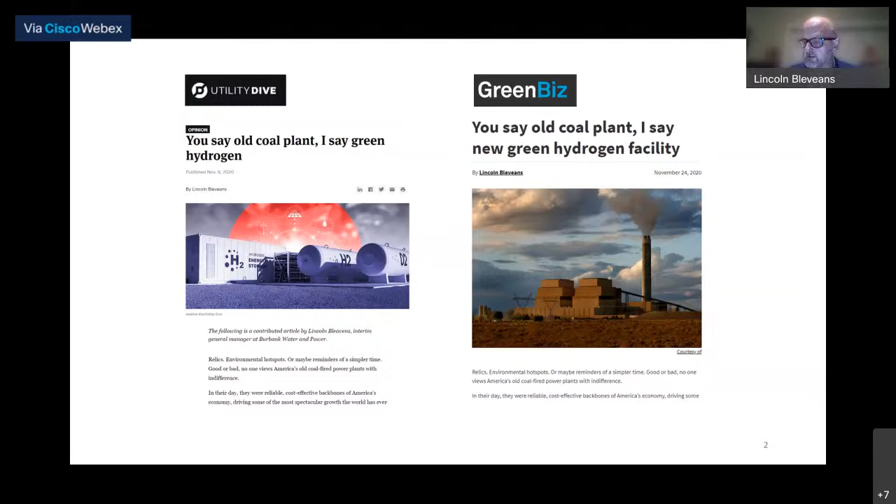So let me start about 250 years ago with the beginning of the Industrial Revolution. The Industrial Revolution kicked off economic growth like the world had really never seen. Lots of things got a lot better very quickly. But as we've come to realize, the Industrial Revolution also started the planet on a slower moving but incredibly destructive path called climate change. And that revolution was powered in substantial part by electricity. And a lot of that electricity was powered by coal in the US.

As we race to mitigate climate change, the cost structure of coal alternatives has pushed coal to the sidelines here. Renewable energy in particular has gotten remarkably cheap. And even natural gas has become less expensive than coal with the advent of enhanced production techniques like fracking and horizontal drilling. And that's left a lot of things stranded, jobs, investments, tax revenue, and the whole economic ecosystems that have grown up around these plants over the decades. So my view is that we can and must do better, both in the US and around the world.

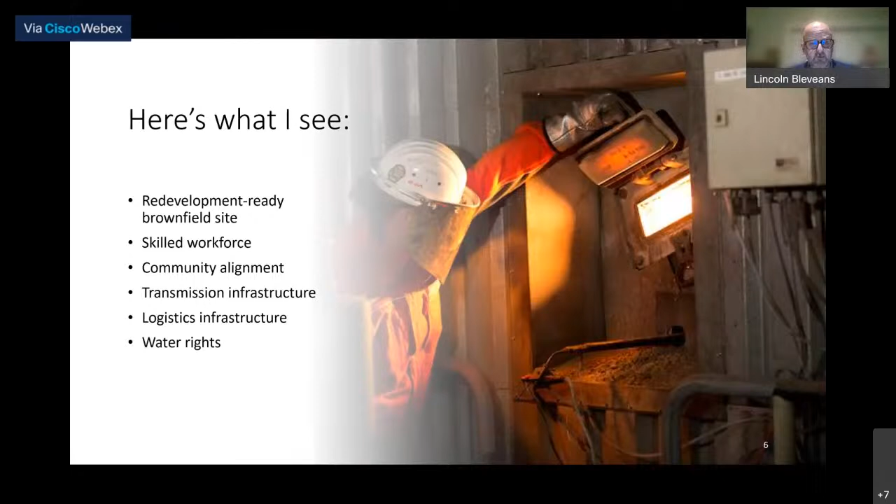So let's go back to that boarded up coal plant a couple of slides ago. It's very easy to look at that and see days gone by, but that's not what I see. I see a prime industrial site ready for redevelopment. I see a motivated community and a highly skilled workforce. I see infrastructure waiting to be repurposed, transportation from road to boat to rail to pipelines, water in abundance, and high voltage electrical infrastructure like transmission and substations.

Then let's take that reality on the ground and rewrite the equation for the age of climate change. Let's add technologies around green hydrogen production and end uses from gas turbines to transportation to industrial processes. And perhaps most importantly, let's recognize that the age of climate change is changing the very metrics with which we measure success. Economic costs in dollars, as we always have, but also environmental costs in dollars, greenhouse gas emissions and pollution, as well as environmental justice issues and social justice issues. Success isn't as simple to measure anymore, and that's okay.

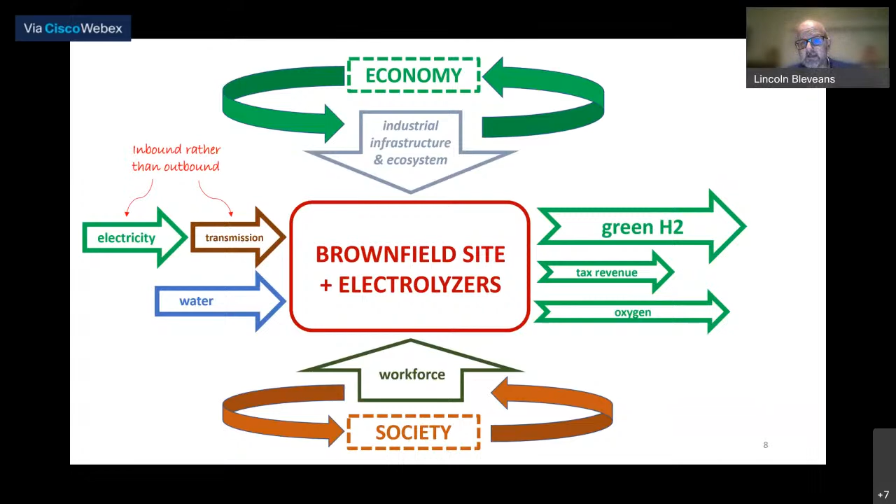So one of the challenges with this model is that traditionally making hydrogen with electrolyzers has involved a tremendous amount of very expensive electricity. And obviously you still need a tremendous amount of electricity, but at least in California, here in the US, the cost of electricity has undergone a massive change. We're seeing, because of solar production, negative pricing. In other words, loads being paid to take electricity off the grid, almost like a tipping fee if you had a trash burning plant. So one of these major inputs, the electricity, has gone from a cost to a negative cost.

So the whole price structure has changed, and that's a whole new world. And I actually think that the California experience will be replicated around the world, especially in places with a lot of solar power.

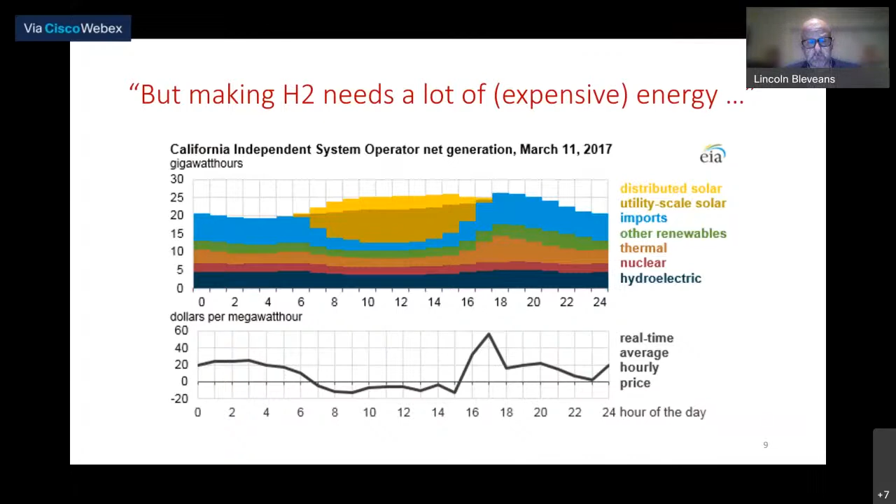That said, there's a big challenge, and I want to recommend an article by a couple of colleagues and friends of mine, Bob Schulte and Fred Fletcher. It was just in Power Engineering, and it talks about the cost of green hydrogen as compared to the capacity factor of the renewables used to produce it. When you look at solar alone at about a 25% capacity factor, you're looking at very expensive green hydrogen on a dollars per kilogram basis. You really need to find a way, whatever the particular market will offer in terms of diversification and energy storage, so that you can drive up the capacity factor of the renewable energy you're using, and thereby drive down the cost of the green hydrogen.

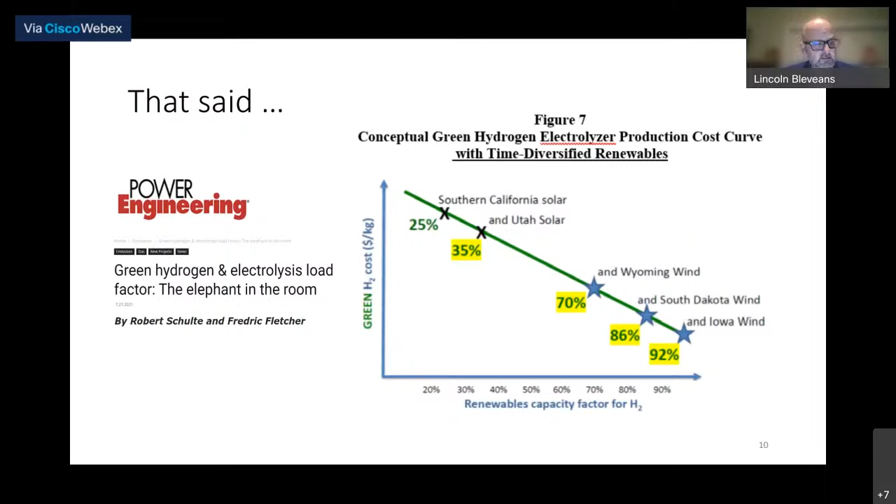This is something that we all need to work on, and I would really recommend this article for folks who want to dig into this. So this isn't, like I said at the beginning, theoretical.

This is actually happening about 1,000 kilometers from here at a place called Delta, Utah, a very small town. There has been an 1,800 megawatt coal plant there since the mid-1980s that has served Southern California, including the utility I worked for until very recently, Burbank Water and Power, which is where Hollywood is. We're taking that 1,800 megawatt coal plant and turning it off in 2025, switching on an 840 megawatt natural gas and hydrogen combined cycle facility at the same site. That will provide baseload power, but also tremendous renewable integration, which is desperately needed in this part of the country.

We're starting off with 25-30% green hydrogen to be produced on site. And Mitsubishi, our OEM, has promised that they will get to 100% green hydrogen firing capability within about a 10-year period. So this is going to be an absolute key to Southern California's clean energy, sustainable future.

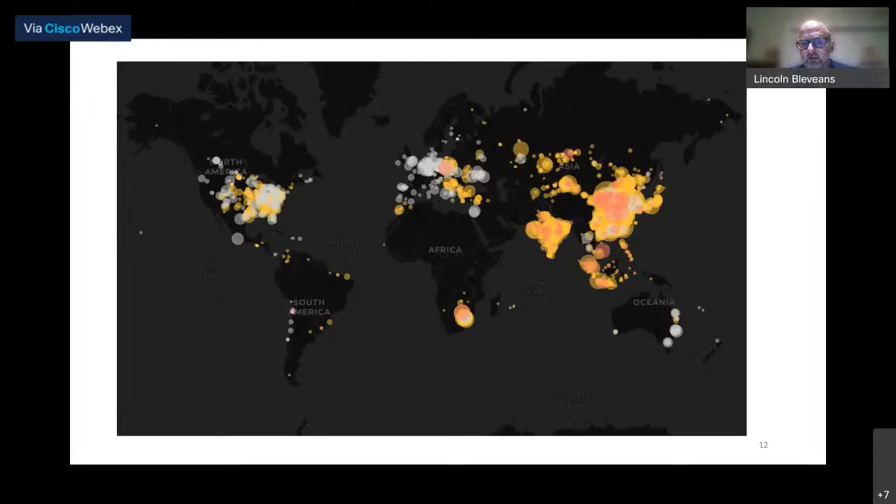And frankly, we're all in this together. If the last couple of years have taught us anything, it's that what happens in one part of the world is going to affect things in the other part of the world, whether that is politics or climate or what have you. So when I look at that map of all those coal plants, I think this is something we can think about applying to our situations no matter where we are, because decarbonization is how we get through this, is how we get through climate change.

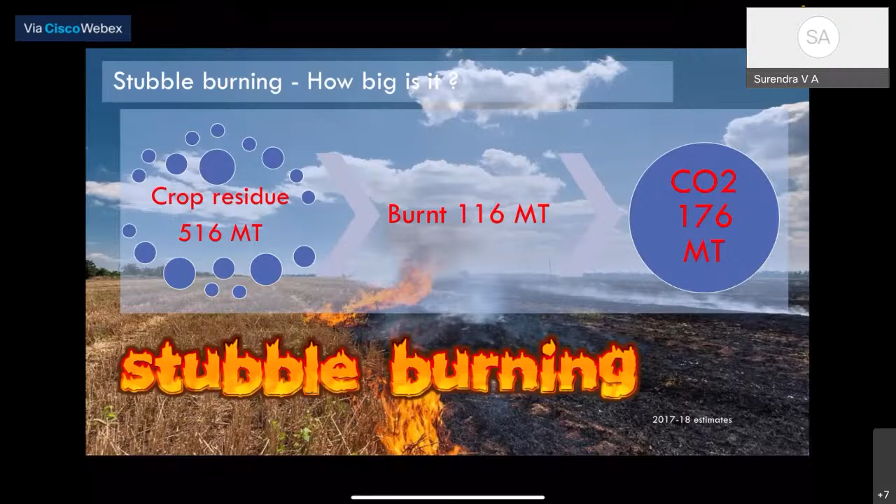And how big it is? If you see, crop residue, we are producing around 500 plus metric tons. Out of this, we are burning 120 million tons approximately, 100 to 120 tons will be burning, and which is giving out 176 million tons of CO2, which is simply going as waste heat energy into the atmosphere and is causing a lot of problems also.

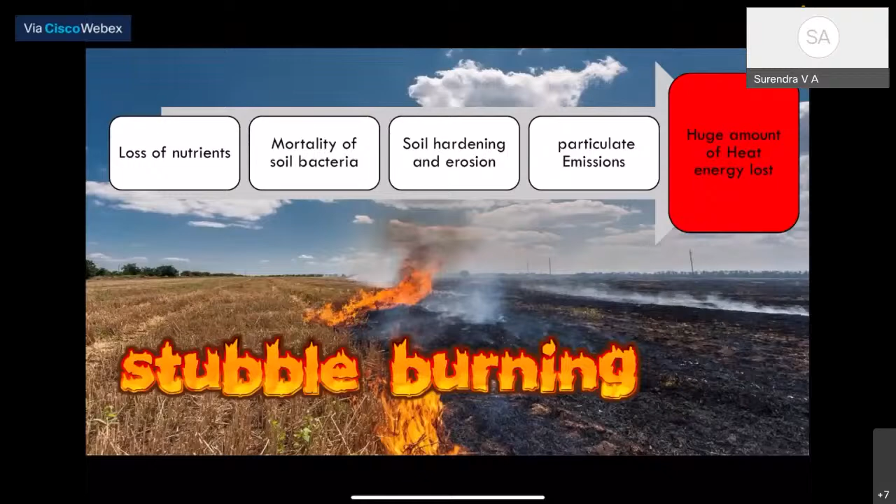Stubble burning causes loss of nutrients to the ground, and mortality of soil bacteria is another issue we face because of this stubble burning. Soil hardening and erosion is one more issue we face, and moreover particulate emission, which is causing a lot of pollution issues in our country. And on top of all these things, we are losing a huge amount of heat energy to the atmosphere, which is a great concern for people like us who are in the energy industry.

How is this a source of pollution? If we see, Uttar Pradesh, Punjab and Haryana contributed around 60% of the crop burning that is happening in North India. Whereas if you see the statistics, even if you burn 1 ton of crop residue on the field, it releases approximately 1.4 tons of CO2, around 58 kgs of carbon monoxide, particulate matter of 11 kgs, 4.9 kgs of NOx, and 1.2 kg of SOx. This is as per the analysis by Center for Science and Environment Analysis.

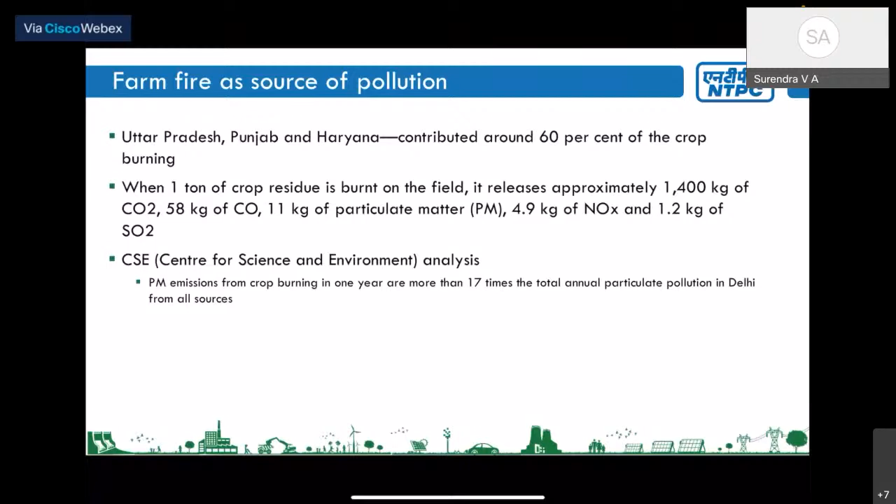PM emissions from crop burning are also very high, 17 times the total annual particulate matter in Delhi alone itself. This is the statistics if you see, and this is the proportion of the pollution that is caused by the farm fires, and this is due to crop residue.

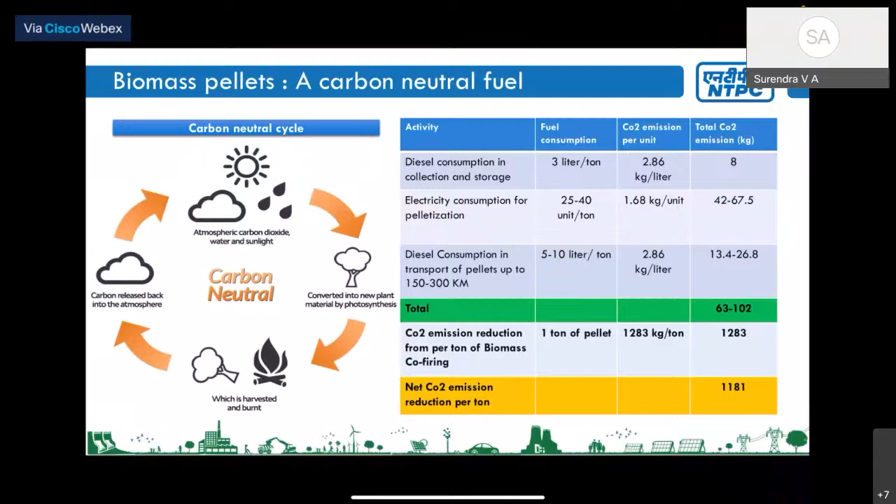And what is the solution for this? The solution is we can use this heat energy that is available in the crop residue by converting them into biomass pellets, which we can say is a carbon neutral fuel. May not be 100% carbon neutral, but we can say more or less it is a carbon neutral fuel. If you see in the cycle, we are consuming around 63 to 102 kgs of CO2 for producing these biomass pellets, whereas we are saving around 1181 kgs of CO2 emissions, as a net saving, there is a net saving of 1181 kgs of CO2 per ton of biomass pellets we consume. This is the basic advantage we get from doing this thing.

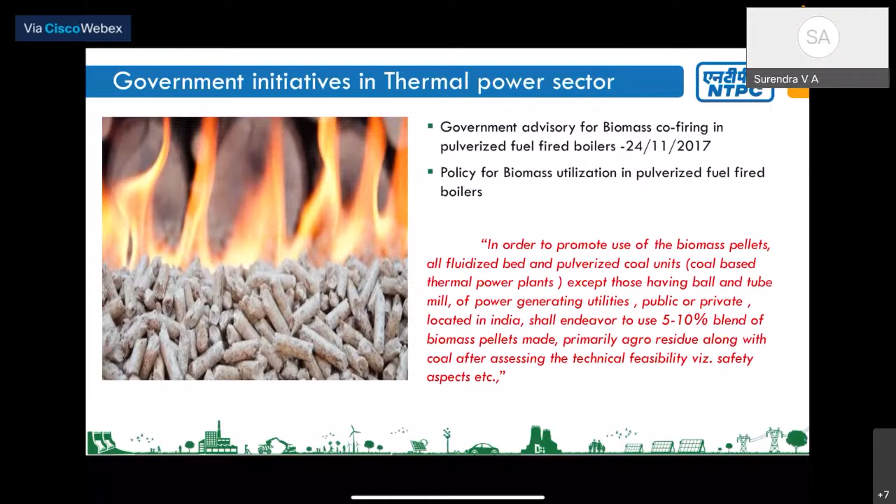And what are the government initiatives for this in the thermal power sector for utilizing biomass pellets? If you see, Government of India has issued an advisory for co-firing in pulverized boilers in 2017 itself. The policy goes like this: in order to promote use of biomass pellets, all fluidized bed and pulverized coal units, except those having ball and tube mills, of power generating utilities, public or private, located in India, shall endeavor to use 5 to 10% blend of biomass pellets made primarily from agro residue along with coal after assessing the technical feasibility and safety aspects. This is a guideline that has been mandated by our Government of India, and taking cue from this initiative, this policy, we have gone ahead to implement biomass co-firing in some of our units.

If we see what are the benefits of biomass co-firing, it's a win-win situation for the farmers and the environment, and even for us also. We get some amount of heat energy from this, and we can reduce the pollution, so reduction of SOx and NOx, and we can neutralize the carbon footprint by biomass co-firing. This is a new source of income for farmers, and employment generation is possible in the biomass industry. These are the 4 advantages we get by biomass co-firing.

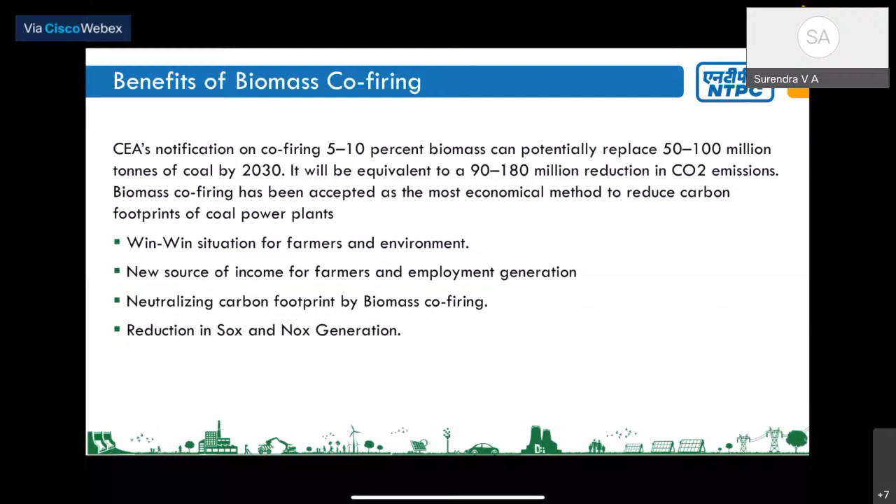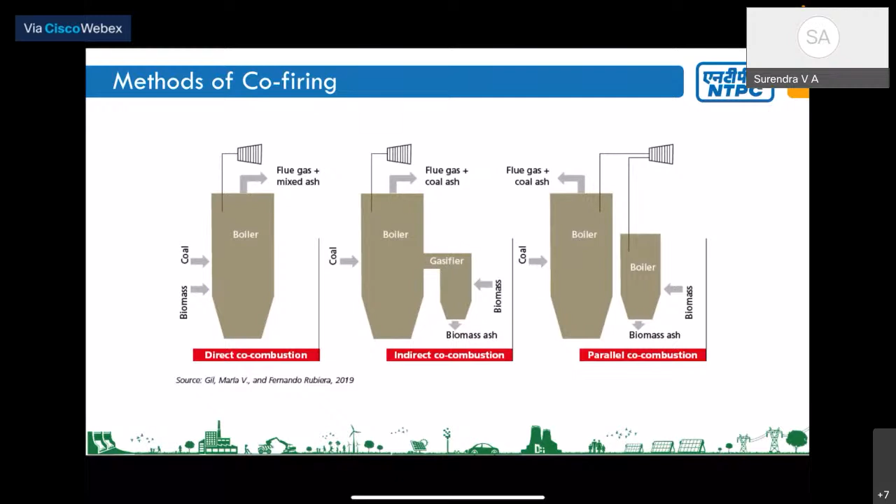And if we go further into the details, what are the different methods by which we can co-fire this biomass in our plants? This is by direct co-combustion, indirect co-combustion or parallel co-combustion. We have adopted the method of direct co-combustion in NTPC. In indirect co-combustion, there will be gasification of the biomass, and in parallel co-combustion, there will be a separate boiler for biomass altogether. But we'll be concentrating more on direct co-combustion only. This is what we have adopted in NTPC.

And if you see, sir, the coal versus paddy straw ash analysis, in this you can see more of the products produced by alkali metals and alkali earth metals in the ash, and biomass ash is characterized by a low melting temperature and a high tendency to slagging and fouling. So if we start increasing the amount of biomass, we will get these problems. But up to 5 to 10% mixing with coal, we may not.

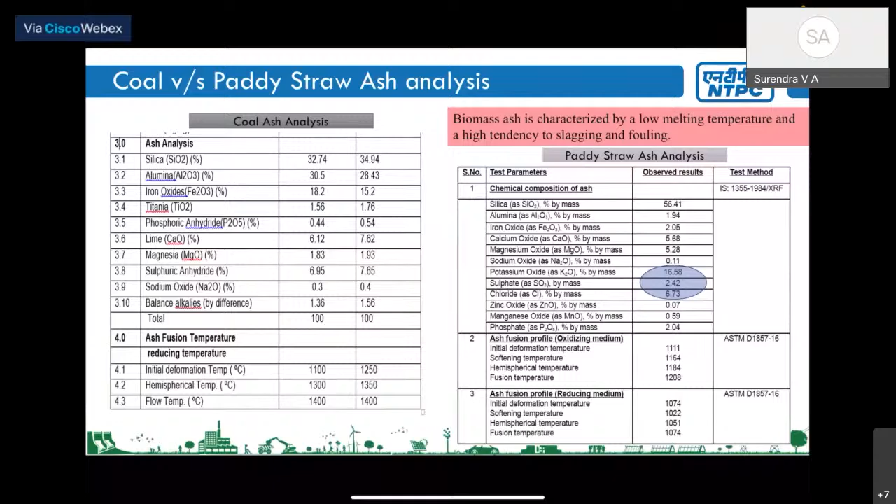Sodium and potassium may react with sulfur and produce alkali sulfates, and the vaporization and subsequent chemical reactions will produce fouling, corrosion, and silicate formation in our boilers. This is one of the risks we get because of co-firing. However, it is seen internationally also that we do not have any major problem if we only mix up to 5 to 10% of biomass with the coal.

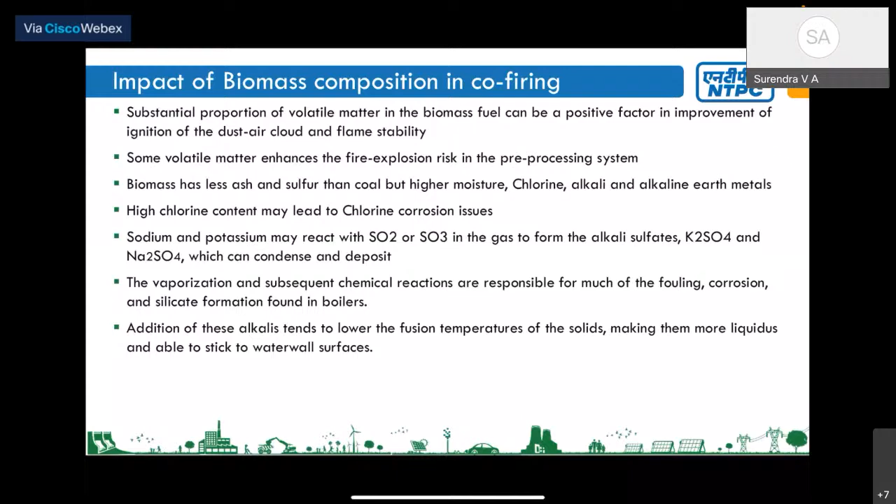Then, how is biomass co-firing going to affect the environment? In the case of CO2, it is almost neutral. It will not increase CO2 emissions. Co-firing will reduce emissions by almost as much as we are saving coal. Anyway, this biomass is going to be burnt in the fields, so that much we are burning here instead. So in our country, we can consider it a saving in CO2 emissions. We are reducing CO2 emissions by that much.

In the case of SOx, biomass generally has much lower sulfur content together with a high concentration of alkalis, so SOx will also get reduced. For NOx, due to lower flame temperatures, thermal NOx will get reduced. It can also reduce NOx through the lower nitrogen content in the biomass. And in the case of particulate matter, up to 5 to 10% mixing with coal, our ESP performance may not get affected, but if it increases beyond that, due to the high resistivity of fly ash, PM 2.5 emissions can increase. This is the impact of biomass co-firing on the environmental parameters.

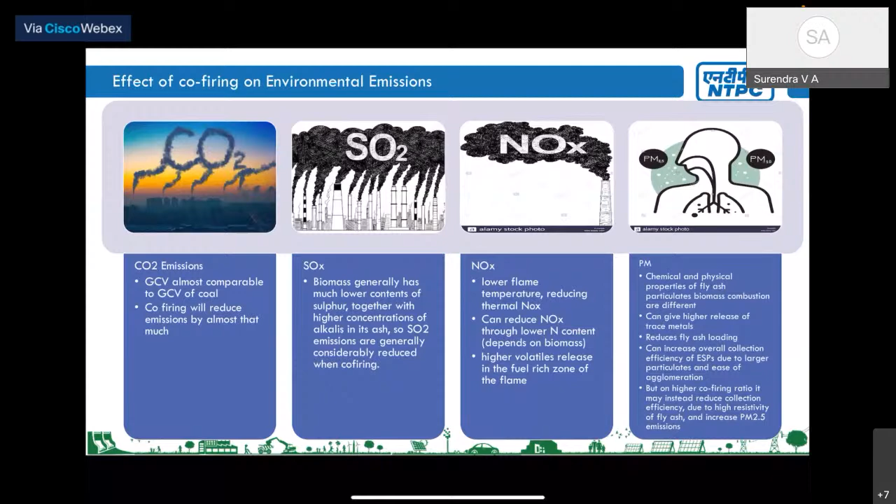And ash utilization, this is one of the core areas where we are utilizing ash. Our ash is totally being used in the cement industry as a product for making cement. In case of the EN 450 standard, it specifies only pure coal or anthracite combustion ash, whereas the 450-2 standard is a revised one, and in this it can allow maximum ash content up to 10%.

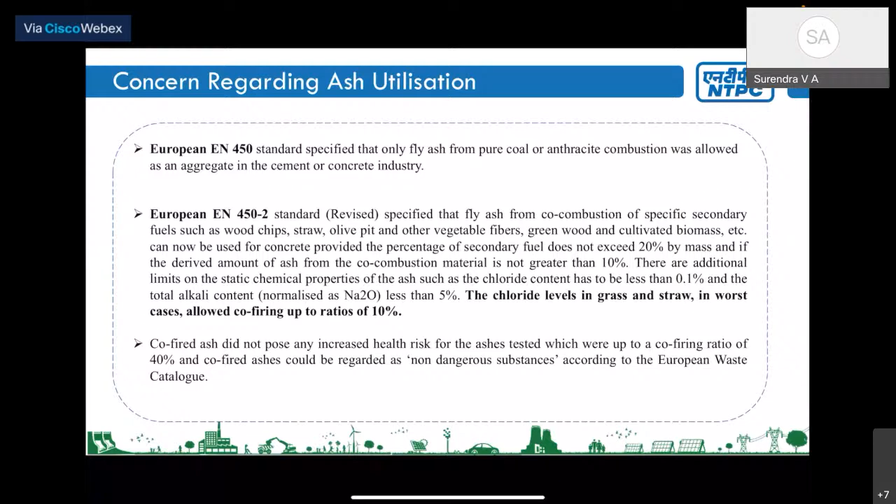That is, the ash produced because of the co-combustion material should not increase more than 10% of the total ash produced. And in addition to that, the chloride levels in grass and straw, in worst cases, allowed co-firing may go up to 10%. This is the disadvantage here. And the co-fired ash does not pose any increased health risk, because it is not producing any dangerous substances in the combustion. This is also one of the points we can think of. So this is the basic concept we have discussed.

Now coming to NTPC's experience in biomass pellet firing. In NTPC, we have used the direct co-combustion philosophy for co-firing, and our NTPC Dadri is the first station that has used biomass pellets for co-firing along with coal. And we have monitored the boiler performance during the biomass co-firing. Based on the experience of Dadri, we have further identified 14 stations for biomass co-firing. So now we have got 15 stations where we are trying to fire biomass. Out of these, 10 stations have already started firing; the remaining stations are yet to start.

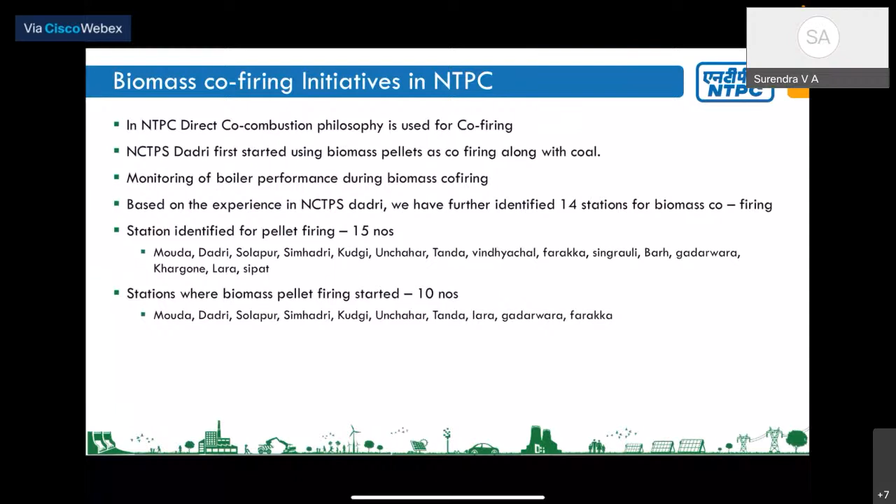What is the strategy we have adopted for biomass co-firing in NTPC? First, initially, we formed a task force for identifying the issues in firing of the biomass. And in Dadri, we conducted trials. We started with 2.5% in one mill and then increased up to 5%. And based on the experience we have gained, we have issued operation guidelines to be implemented across NTPC stations. At the station level, these operation guidelines will be further converted into local management instructions, LMIs, which will address the responsibilities and checklists to be prepared for taking necessary actions.

And these local management instructions shall also have standard operating procedures for all the activities in detail: how to do the handling, how to go for blending, how to store it, how to do the activities of storage, how we have to go ahead with combustion improvement, and what parameters are to be monitored. All these things will be explained in minute detail in the SOPs.

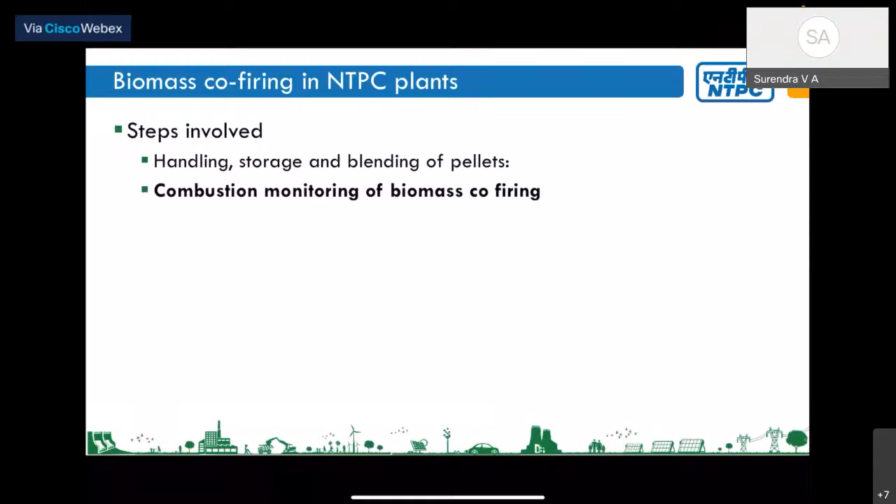Then for biomass co-firing, there are two steps involved. The first is handling, storage and blending of the pellets; this part is only handling. The second part is the combustion monitoring of the biomass co-firing, which is very important for us. For handling, storage and blending of pellets, first we'll go for receipt and unloading. Nowadays, we are getting biomass pellets only through road. This industry is at a very nascent stage, where pellets are only being transported by lorry. Rail transport has not yet started; that much mass production is not there right now.

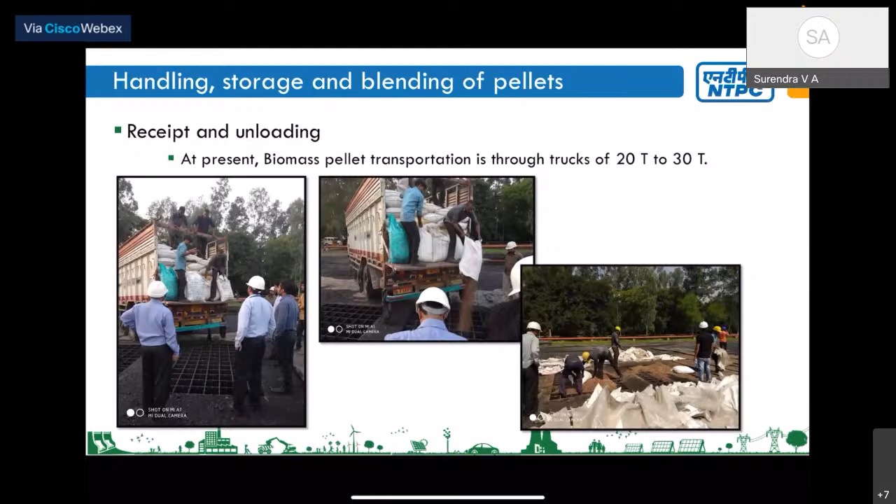So after getting the biomass pellets, we unload them in the identified areas in the CHP, coal handling plant. Then we keep them covered, because biomass pellets are hygroscopic in nature, so these are facilities where moisture should not enter. At the same time, biomass pellets have a high amount of volatile matter. So the area where we are going to store them should have facilities for firefighting, and facilities should be developed to transport from the storage area to the blending area, that is, up to the reclaim hoppers or the area where we put it onto the conveyor.

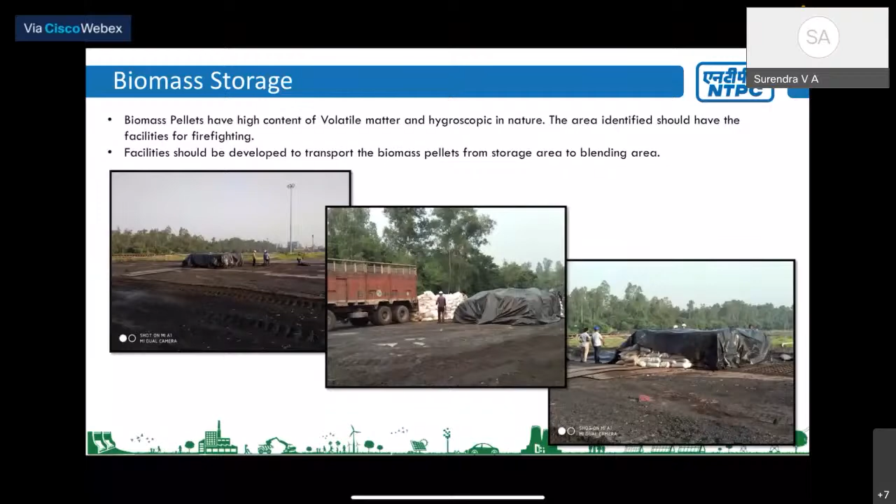And for blending and bunkering of the pellets, the blending ratio we have maintained only up to 5%. We have decided not to go beyond 5%. And in this case, it is site specific. Every site is different with respect to the configuration of the coal handling plant. So every station will identify where the blending shall be done, the methodology of how they will feed the pellets, and the chute or TP, transfer point, where blending shall be done. Then what is the control methodology?

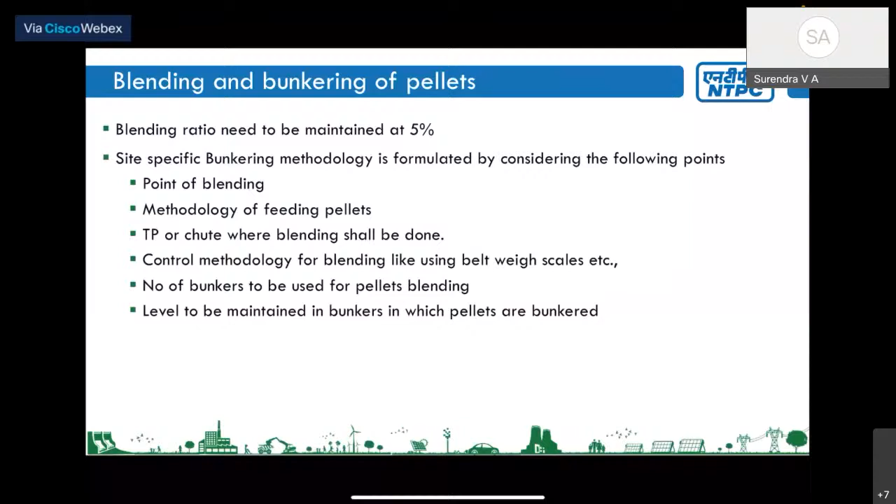How we will control, whether we have to use the belt weigh scales or whether belt weigh scales are not available, then implementing them. And number of bunkers where we will be using these pellets for blending, and how much level we have to bring down for accommodating the pellets in the bunker, because in a day we are getting pellets only at some particular time. We are not getting them on a continuous basis. So we are monitoring the levels also in the bunkers where pellets are to be bunkered.

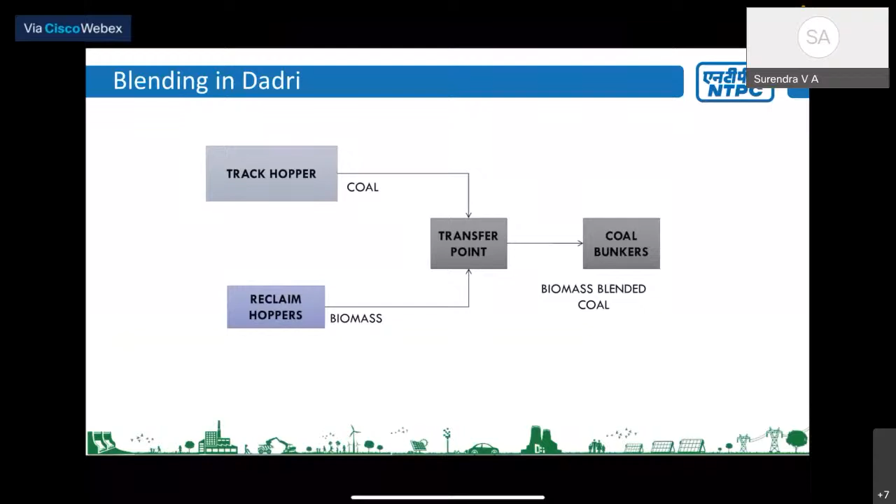Strategies for blending in Dadri is that there is a track hopper and the reclaim hoppers are there. From reclaim hoppers, we are feeding biomass, and from the track hopper, we are feeding coal. And at the transfer point, we are combining both and blending it to the identified bunkers only. We are not doing it in all bunkers. Of course, we have done modification in all, but we will identify and put them in those units, with the information to the control room.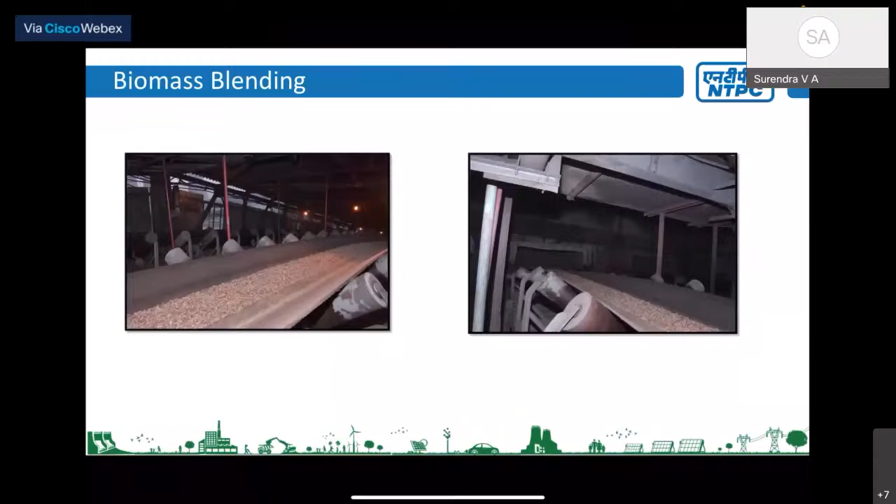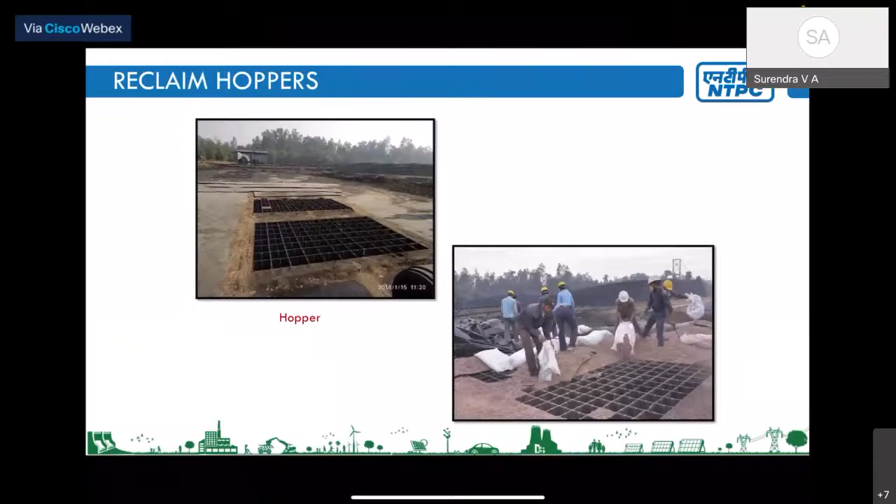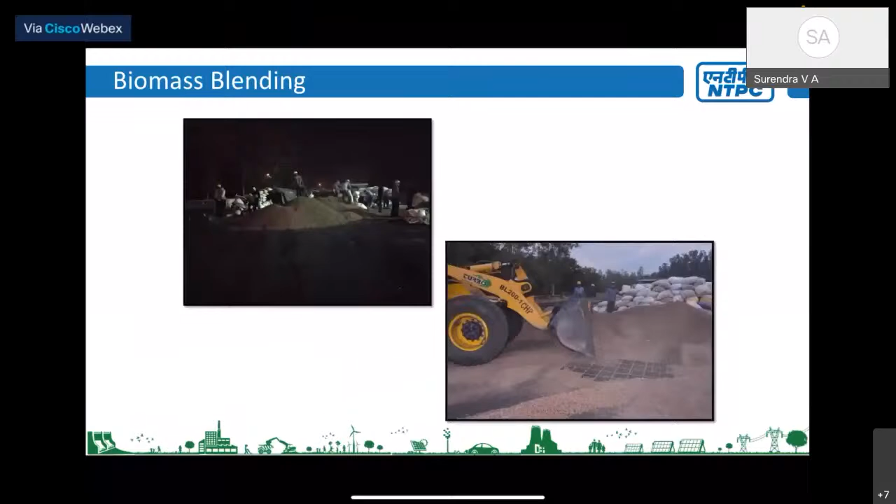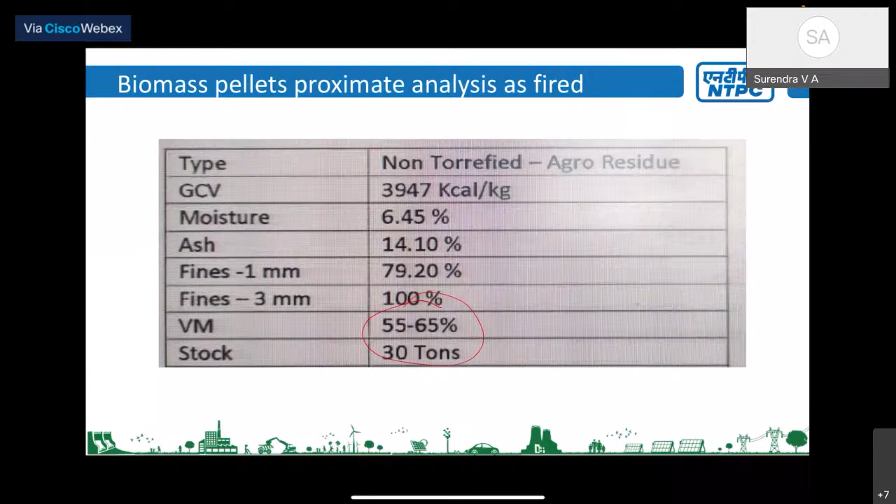And coming to the type of biomass we have used and analysis of the biomass, we are getting almost equivalent GCV. This is the pellets we have used in one of the stations, where GCV is around 4,000. Moisture is very less, 6%. Ash is 14%, and volatile matter you can see is very high, 55 to 65%. And per truck we are getting 30 tons.

So for handling this biomass, what are the precautions we have taken while the unit is in operation? The first thing is that in the fuel pre-processing system, we have ensured that the mill inerting system is charged up to the mill inlet to take care of any fires that can happen.

Mr. Surendra, if you can conclude in a minute. Yes sir, it's only 1 minute or 2 minutes.

And the valve provided at the inlet is operable from the control room. Then the mill inlet temperature control loop, we have changed. So we have done some modification where it can control the inlet temperature of the mill. And similarly, for the mill hot air gate also there is a protection provided with mill inlet temperature. And we have prepared an SOP for unit operation with biomass.

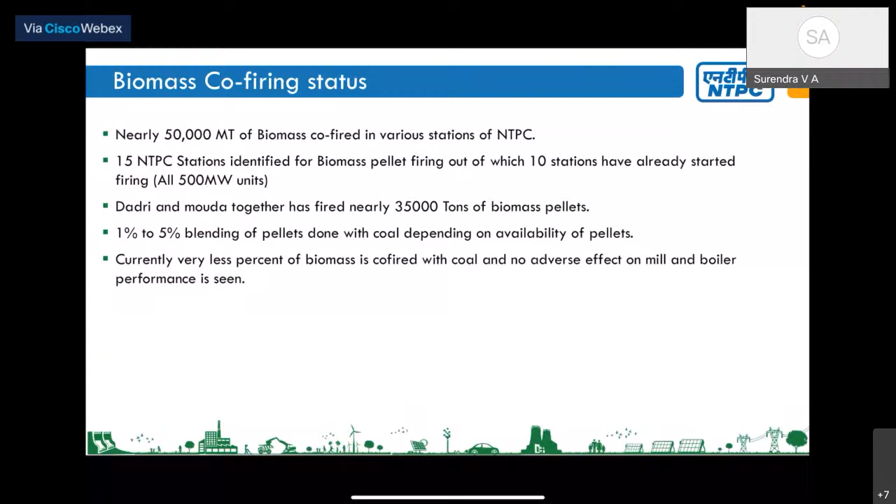And biomass co-firing status, sir, we have fired around 50,000 tons of biomass till now in NTPC. Mostly the Dadri and Mauda stations together have fired around 35,000. The blending is being done from 5% to 1% pellets with coal, depending on the availability of the pellets. And the issues we are facing are very irregular supply of pellets due to poor pellet manufacturing capacity and poor stacking infrastructure for pellets. These are two things. Thank you.

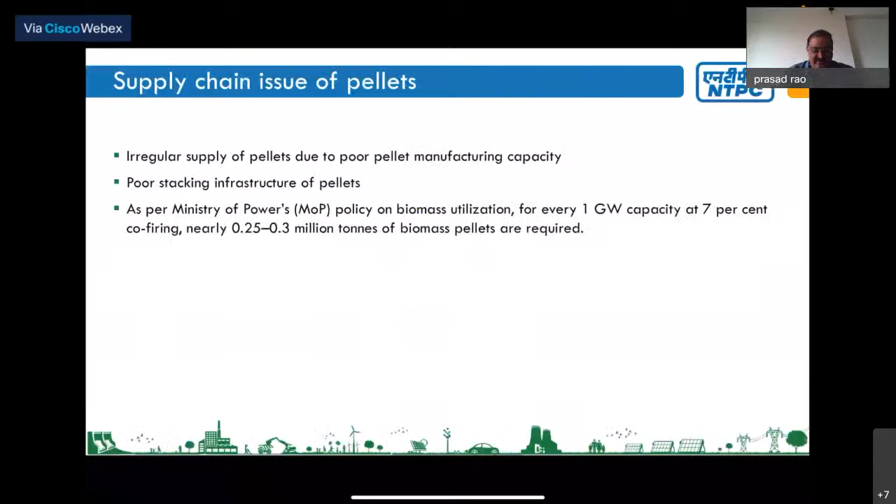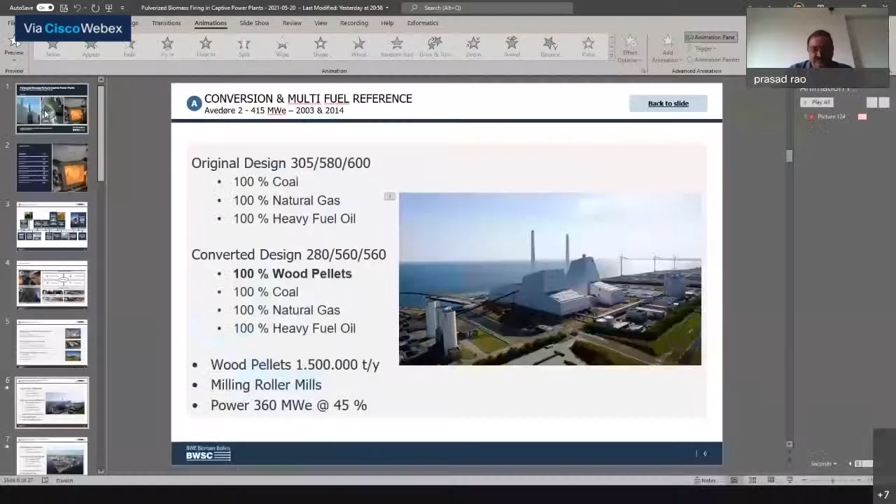Yes, my name is Sogard. Thank you very much for the introduction. Let me see if I can share this presentation. Is this visible on the screen now? Yeah, we are able to see it. Okay, very good.

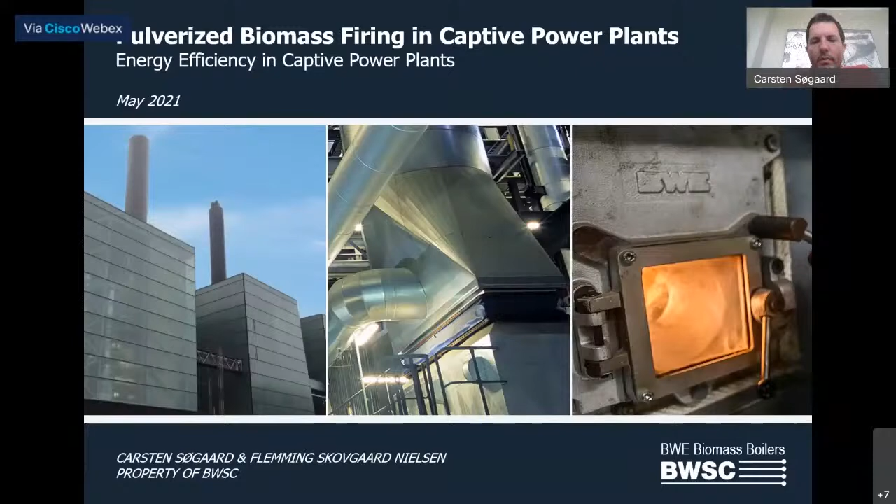So I will go through a short introduction of BWSC, some of our boiler concepts, references, and of course speak a little bit about multi-fuel firing, as we just heard about co-firing in Indian power plants. But I will also speak about some of the issues regarding agro biomass fuel, some of the difficulties and challenges that NTPC already is entirely aware of, and also how boiler design can be adapted to take on these challenges.

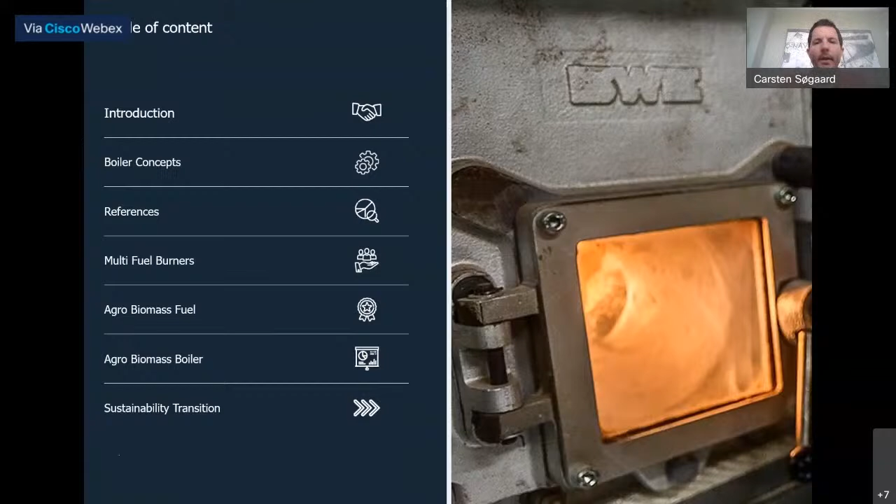BWSC has really a long history. It reaches back to 1843, 46, and has primarily been doing its business on diesel engines and diesel-powered ships throughout most of its life. But the division called Burmeister and Wain Scandinavian Contractors and Burmeister and Wain Energy was separated from this mother company in 1980. And these two companies have actually just recently in 2017 been rejoined into one company.

On the biomass boiler side, UK and Denmark have been really good markets for us. We are talking about 10 to 50 megawatt electrical biomass, fully biomass-fueled power plants designed for agro biomass, and we are seeing now an increasing interest in India for our technology on this matter.

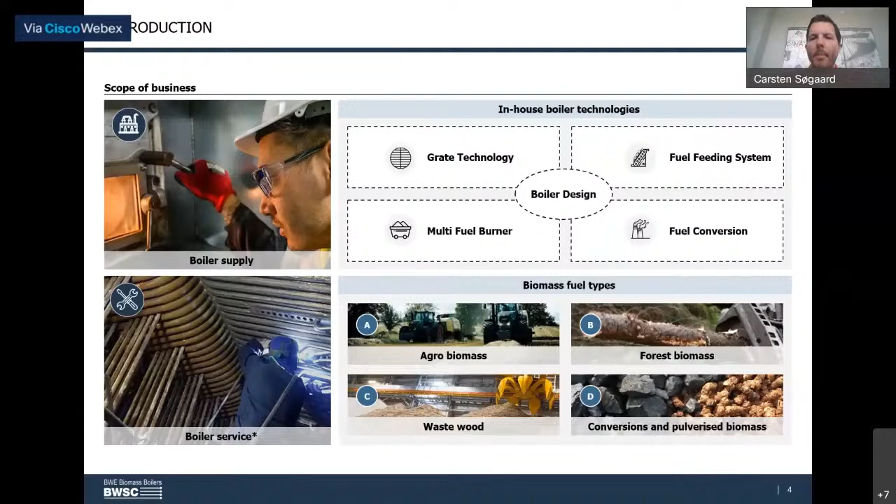And we also are specialized in fuel conversions of large utility boilers like what NTPC just was talking about, at least co-firing. We are focusing more on entire conversions and also multi-fuel firing in boilers. That can sort of be condensed down to three elements. The first line here, the fuel conversion in the size of 100 to 800 megawatt electrical. We have a number of references in that.

But most and foremost, our biomass boiler focusing on agro and forest biomass in the size of 10 to 50 megawatt electrical. It doesn't sound like much when, in the total power fleet of the world, we are talking about gigawatts, probably even a lot more than that. But that's the size that is adaptable to agro fuels when we consider all aspects of the business model.

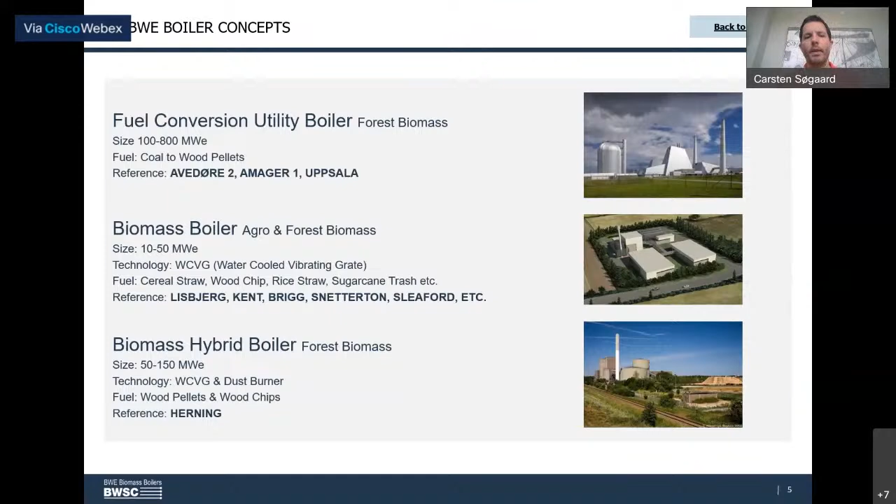And then we have one reference on a hybrid where we combine grate firing, which is primarily our biomass boiler built on grate firing, combined with dust firing. This is our reference Avedøre 2 in Denmark. This is an ultra supercritical boiler that was designed and built in the late 90s.

It was originally designed as a coal boiler, but the political establishment at the time here was already aware of the damaging effects of fossil fuels. And for that reason, permission for coal operation was simply not given, even though it was originally the intent. But instead it was commissioned in natural gas, which, despite being a fossil fuel, was considered a lot less harmful at the time, which it in principle also is.

But already 3 years later, after the commissioning on natural gas, it was decided to convert this boiler to pulverized wood pellets, which was considered a carbon neutral fuel. And there's a great deal of discussion going on whether it is or it is not. I mean, I think it's pretty evident that it is. It's a matter of how you consider it and what cycle aspect you're putting onto that.

It's certainly more difficult to see the cycle of the carbon dioxide neutrality of it on a short-term basis. But for sure, on a long-term basis, it should be considered as such. Anyway, the conversion of this boiler was made through minor modifications of the burners and the roller mills, and in this way, this plant actually became

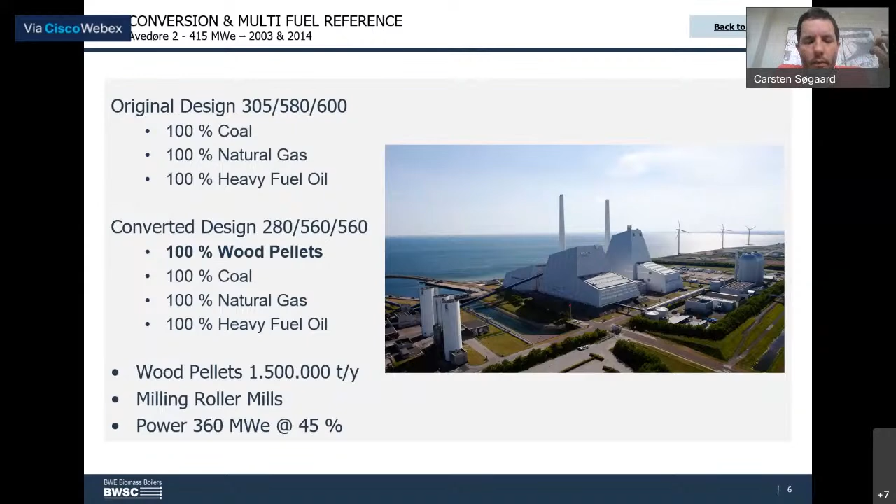The political opinion against fossil fuel and building on the success of the Avedøre 2 was leading to the conversion of Amager 1, Unit 1, which is a subcritical boiler, also originally built by Burmeister and Wain for coal, but it was converted to wood pellets and straw pellets, straw pellets being an agro biomass, and commissioned in 2009.

But straw pellets have particular chemical characteristics that are, so to speak, challenging and difficult in a boiler designed for coal. We already heard a few of the reasons, but I will get back to that later. The straw pellets were very quickly abandoned as a fuel in this plant, simply because of slagging issues on the superheaters. This was something that we were aware of, and we considered the design carefully. But however, we faced some difficulties that led to abandoning this fuel.

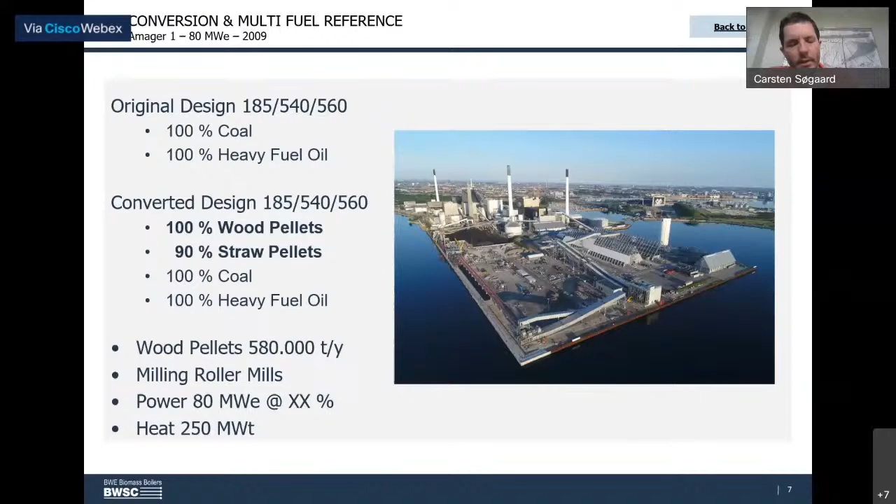Now, moving on to India: in 2009, we moved into the Indian market with the establishment of an Indian division, now known as BWSC India. And the acquaintance with Essar Power led to the order of the Hazira captive multi-fuel power plant of 2 times 150 megawatt in 2010. It was commissioned in 2014-15, I believe.

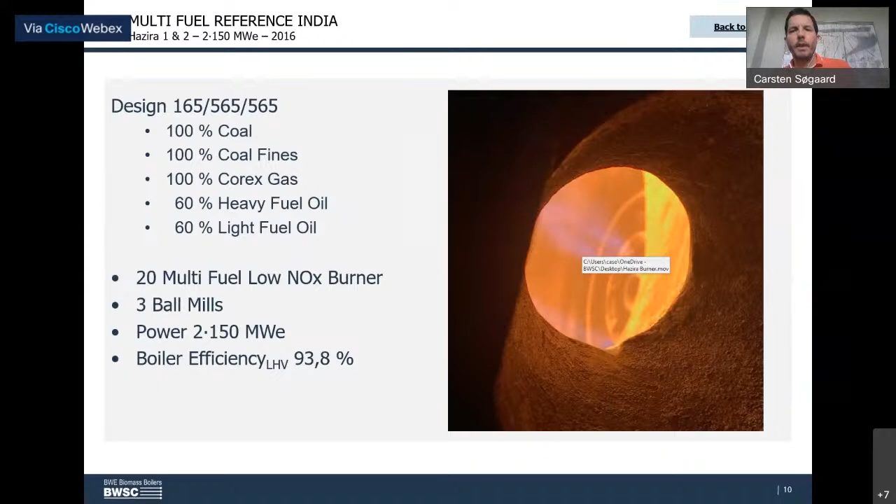This was also a subcritical 2-pass boiler with a total of 20 low NOx multi-fuel burners that could take the waste fuels from the Essar steel mill that was located just next to it, and had the capacity of burning a large variety of fuels, among them Corex gas, coal fines, fuel oils. Not the environmentally nicest fuels, but they were waste fuels from the steel mill. Here we see a picture of the Corex gas burning in the boiler. There's a nice blue flame there.

So in principle, what we can say about BWSC or BWE pulverized coal boilers is that they're in principle all biomass ready. There's no carbon lock-in. Biomass, however, has to be seen in a more narrow perspective. Not all biomass fuels are equally adequate for transitioning pulverized boilers into pulverized biomass burning. There is a large limitation in this.

But the bottom line is that relatively minor modification is needed and limited investments, but they need to be returned for sure. And for that reason, some sort of carbon penalty or green incentive needs to be added to such a conversion or transition from coal to pulverized biomass burning.

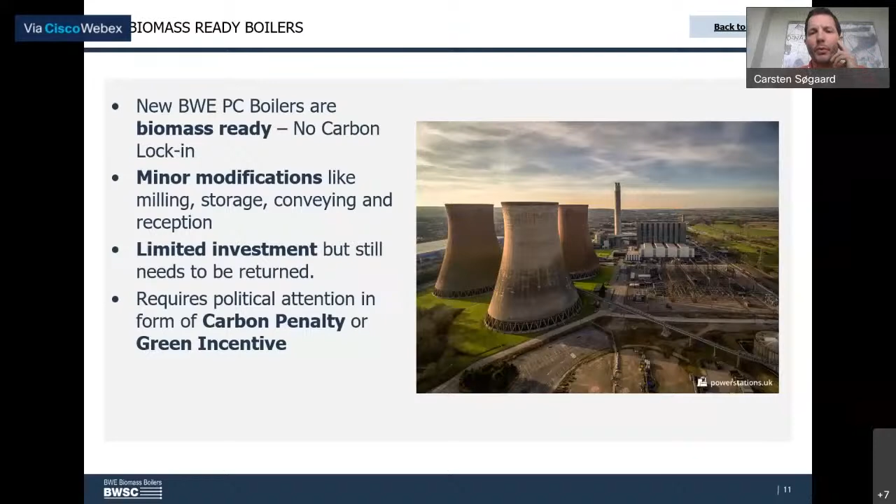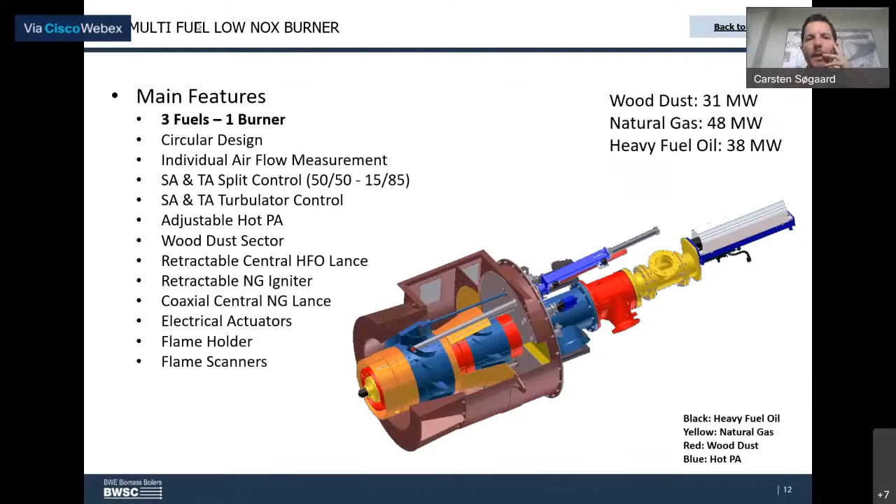An example of our multi-fuel burner for Avedøre 2 has a total capacity of nearly 50 megawatt on natural gas and 30 megawatt on wood dust. This is the multi-fuel burner for the Hazira plant, having the capability of burning Corex gas, coal dust and heavy fuel oil all combined in one. And the Corex gas is a low pressure, relatively lean gas that requires relatively large dimensions.

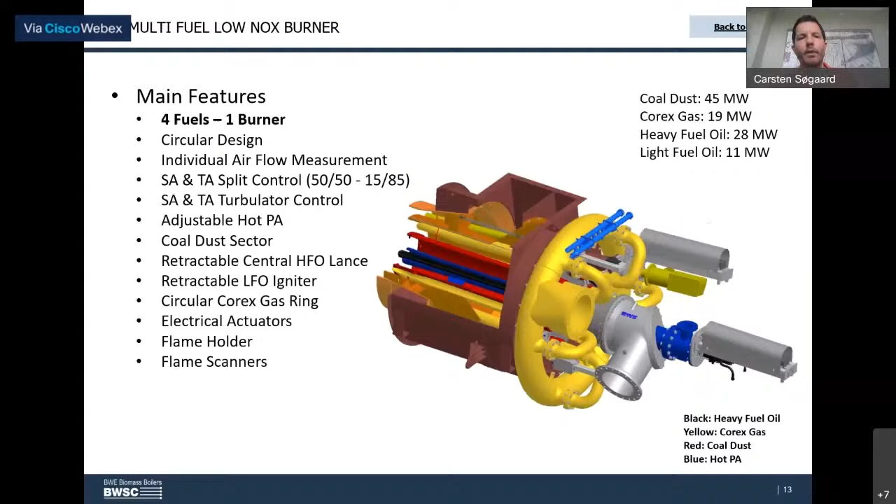I'd like to speak a little bit about biomass in general. It's misconceptualized in the sense that it's often used as one term, biomass. But there's a huge variety of biomasses in the world, and it exists in huge abundance. The quantities of biomass we receive from agriculture are vast, and the diversity is equally large. We see that in its physical geometry, physical characteristics, but certainly also its chemical characteristics.

One of the fuels that resembles coal the most is wood, and it's sort of in a category of its own. And therefore, that particular fuel is uniquely usable as a conversion fuel for utility power plants. The chemical composition of the large group of other biomass, particularly agrobiomasses, does not make them particularly fit for conversion. Maybe supplement 5 to 10%, as was mentioned by NTPC, but certainly not full conversions.

What we see in this chart here is the representation of the ash deformation temperature of various biomass fuels. On the very far left, you will find olive cake. Olive cake is an industrial biomass waste product from olive oil production. There are other characteristics of biomass that are of interest, among them the potassium, the chlorine, the sulfur content. Right here, I'm particularly focusing on the deformation temperature, and we will see that it is nearly 1350 degrees centigrade, which is a very, very high deformation temperature.

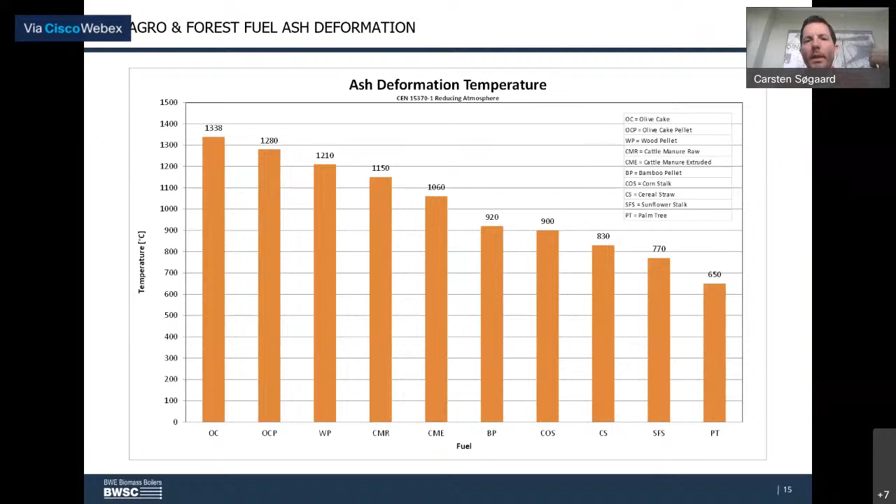So this is the BWSC biomass boiler that can take in straw or any kind of agricultural biomass with low ash deformation temperature boiler design. It's based on a vibrating grate combustion technology. There is, on the far left, a conveying system that brings straw bales, which could be paddy straw or cereal straw in Europe typically. A shredder and a stoker pushes the fuel onto the grate.

We have pendant superheaters that are exposed to slagging. They're designed for it, they're supposed to be slagged, it's a part of the design. And thereafter we have traditional economizers and flue gas coolers.

We also have our own sort of combustion air preheating system that is not built on tubular or rotating air preheaters, but uses a transition of heat from the flue gas to the air using water as a heat carrier. In principle, we do that in reverse order: we start by heating up the air, cool down the water, and then take out the heat from the flue gas. Therefore we call it a reverse heat shift system. It's quite unique and gives a lot of advantages in controlling the flue gas temperature out of the boiler.

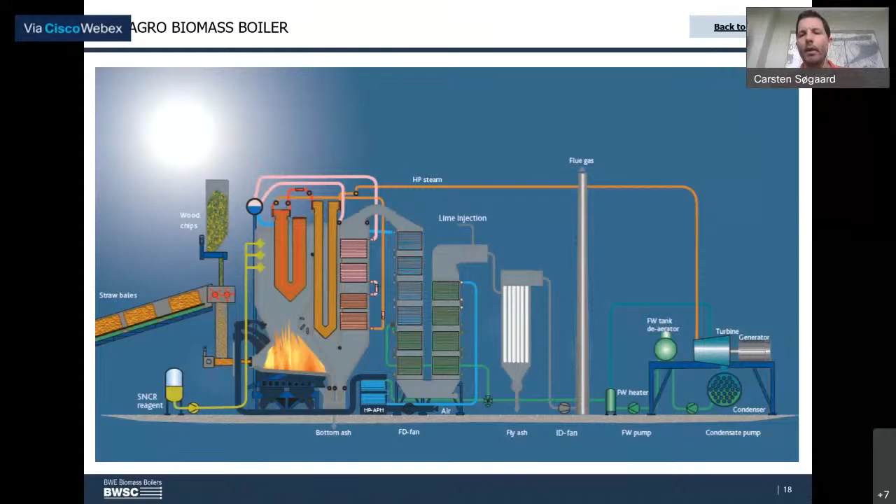So looking into India, I call this the Indian untapped resources. I'm not sure these numbers are entirely updated, but if we look at particular feedstock, there are large quantities of agro residues in India. If we transform that into an equivalent of power, based on our biomass boiler technology and the efficiency typical for this kind of technology, it equates to around 20 gigawatts of electrical power.

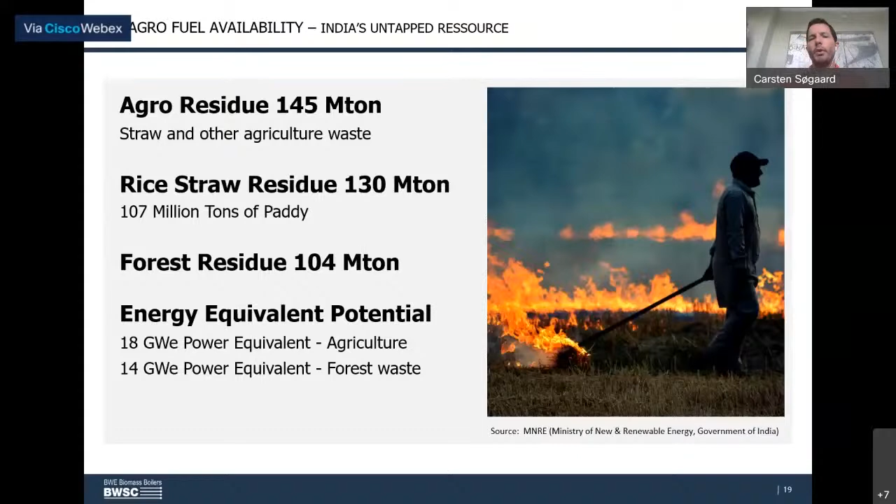So academically speaking, there's a large potential for utilizing this untapped resource for something useful rather than field burning. We do know that field burning not only releases harmful pollutants, but it is certainly a source that literally, in many places in India, goes up into smoke. It certainly also did that here—I remember from my own childhood that fields were burned off every summer after harvest, and huge quantities of energy are released in a very, very short period of time. So this picture here, particularly the lower part, really shows the transition from field burning and coal as a primary fuel into a more sustainable and green energy strategy.

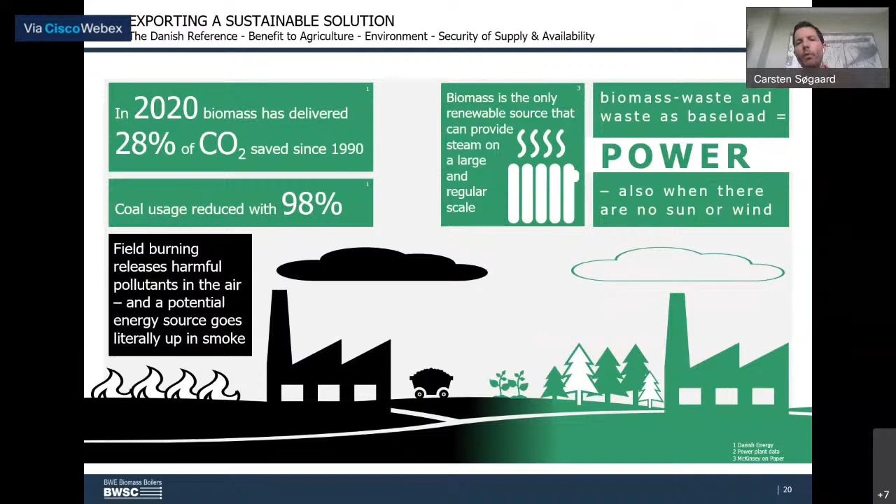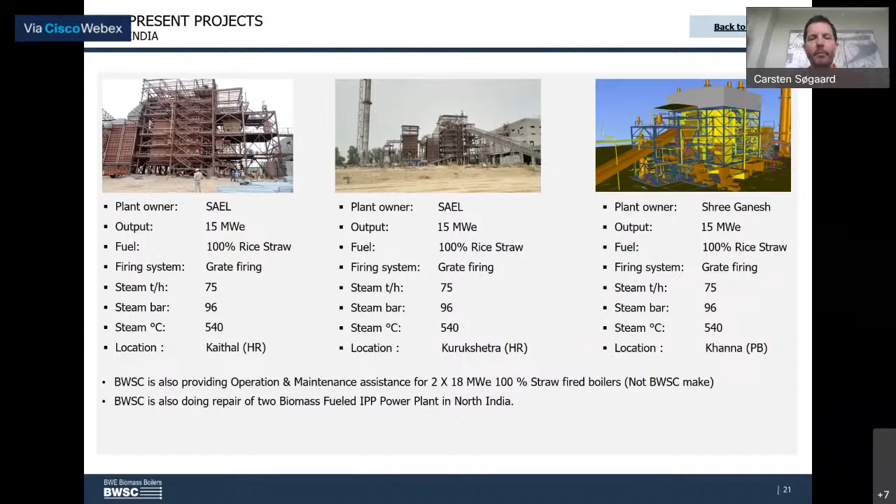We better prepare for that. And therefore, my closing remark for this presentation will be that we better be prepared for opportunities that might not come than be unprepared for one that does. That will be my final words for this presentation. I thank you for your attention and the time you have spent to listen to me.

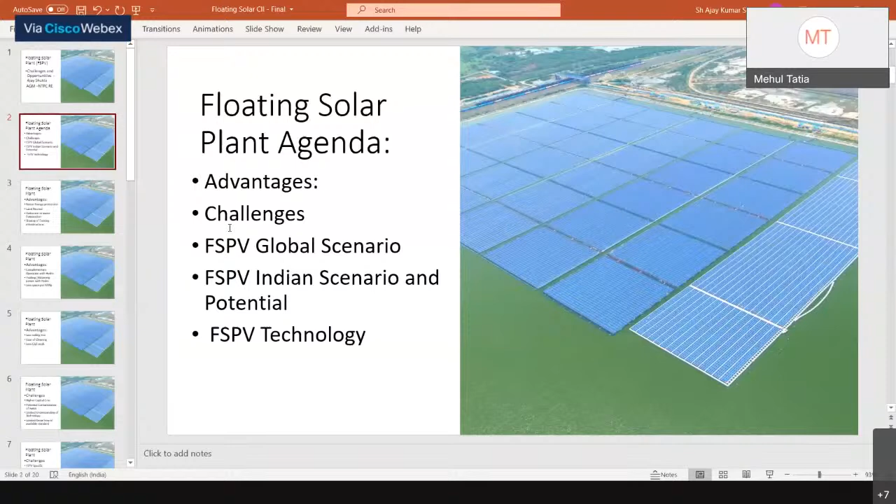As compared to land solar, energy production is better in floating due to the cooling effect. Second, as we all know, in India land is the main challenge, and a lot of water bodies are available which can be used to put this kind of floating solar plants. So in India, it started in a very baby step, like in kilowatts, and now we are putting in megawatts, and currently around 2,000 megawatts is in the pipeline.

Second thing, in most man-made reservoirs it reduces water evaporation, and many dams and irrigation systems have power evacuation systems, so that can also be leveraged by these floating solars. That is the extra advantage we get in floating. And as in a hydro plant, if we put floating solar, it can give a complementary advantage. So in the day, where radiation is high, we can get the solar, and then for peaking or for balancing power, we can use the hydro.

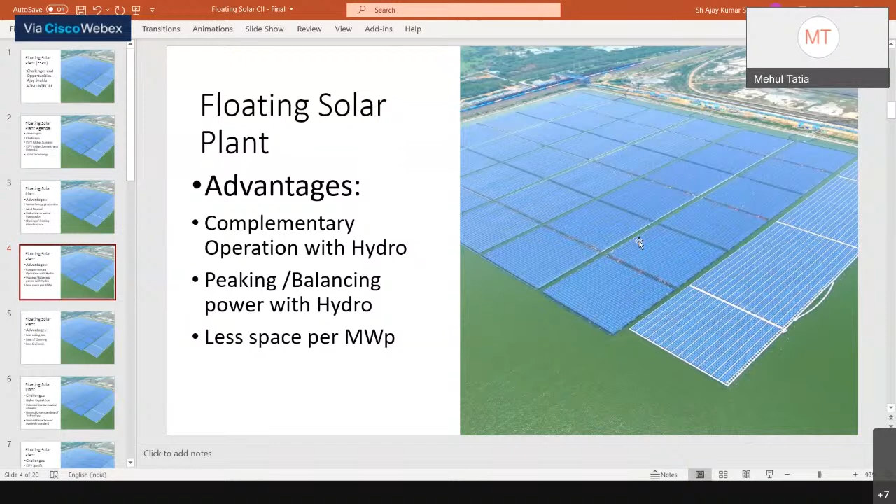One more advantage in floating: it consumes less land as less space is required. For ground mounted, you require around 4 acres per megawatt. In floating, only around 2.5 acres is required. So the space requirement is also less. Apart from that, you don't have soiling losses because in land solar a lot of dust is there. You can do maintenance and the quality of the panel can be maintained. And for erection, as compared to land, you don't have much civil work except anchoring and mooring, so it is quite less as compared to land solar.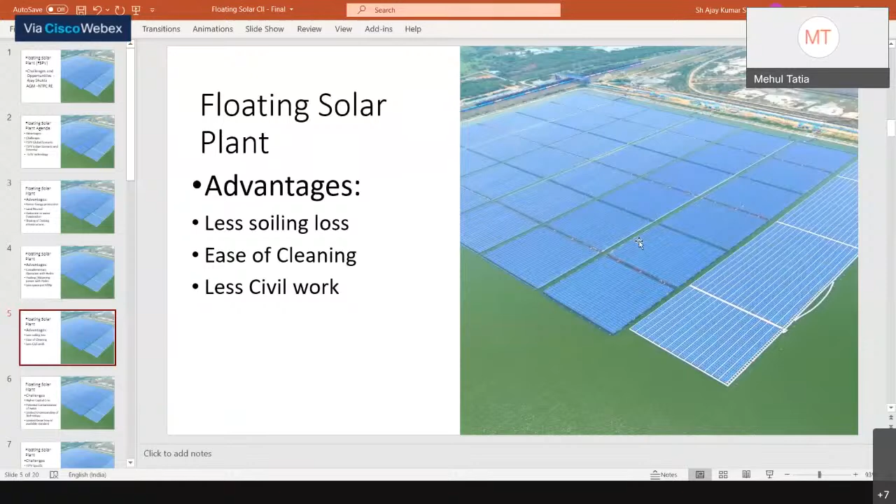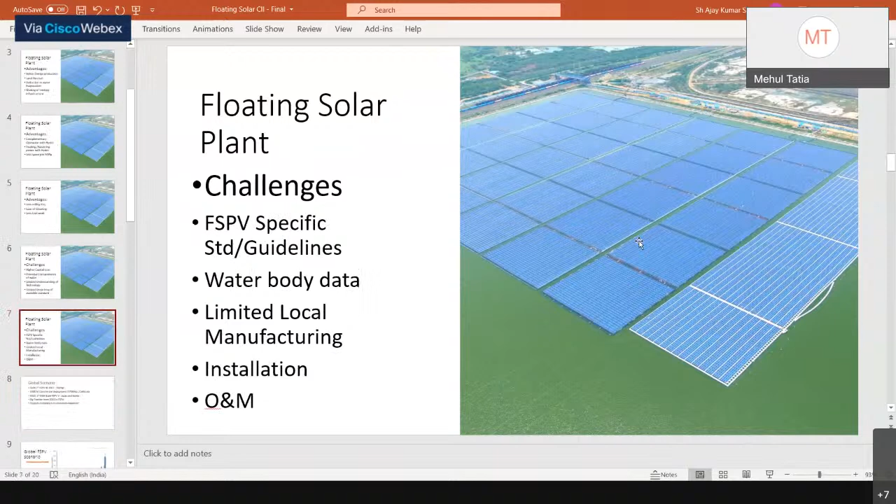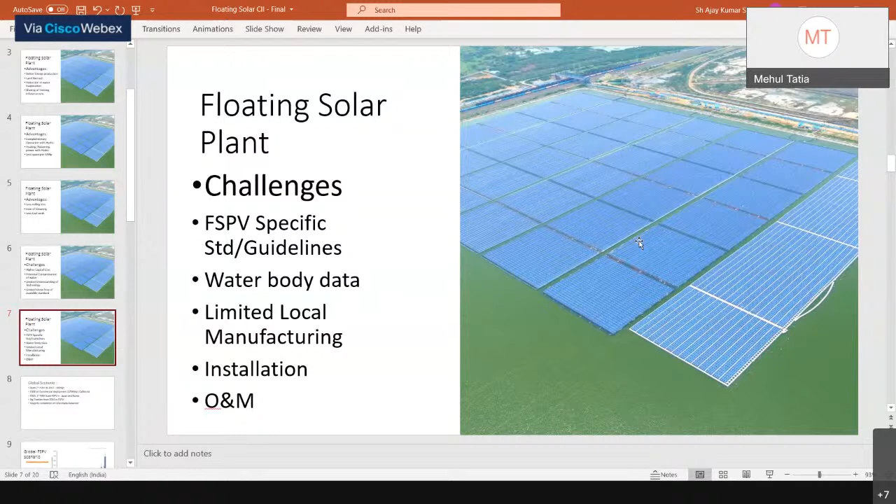As we said, this is an emerging area across the globe as well as in India, so floating solar specific standards and guidelines are being made. In India, we have huge water bodies, but apart from man-made ones, we don't have structured data. Especially we face a challenge with the floaters because we have limited capacity of manufacturers, so capacity is also a challenge. And since we are installing in water, if the water depth is high, there are a lot of safety issues during installation. And in O&M also, if you need to replace the panel and so on, that can also become a challenge.

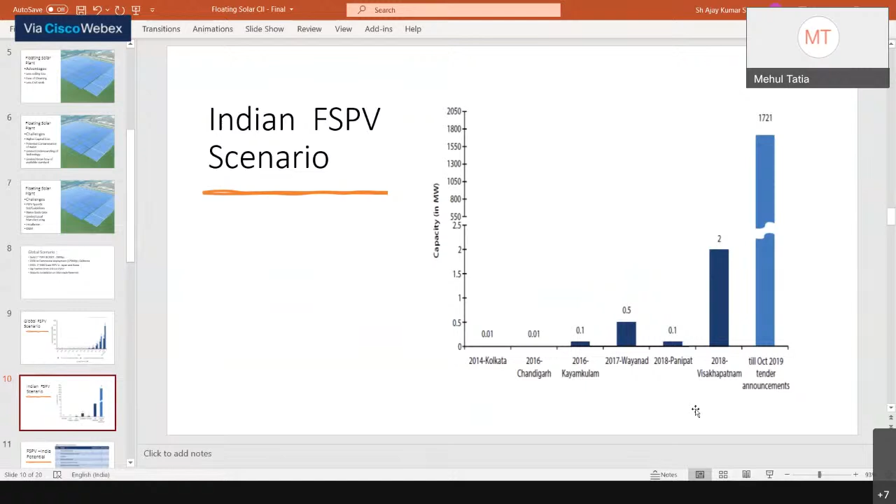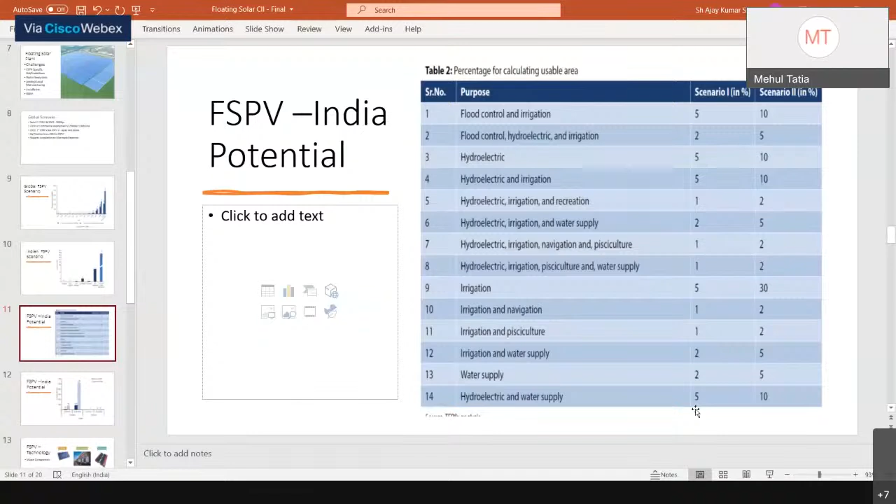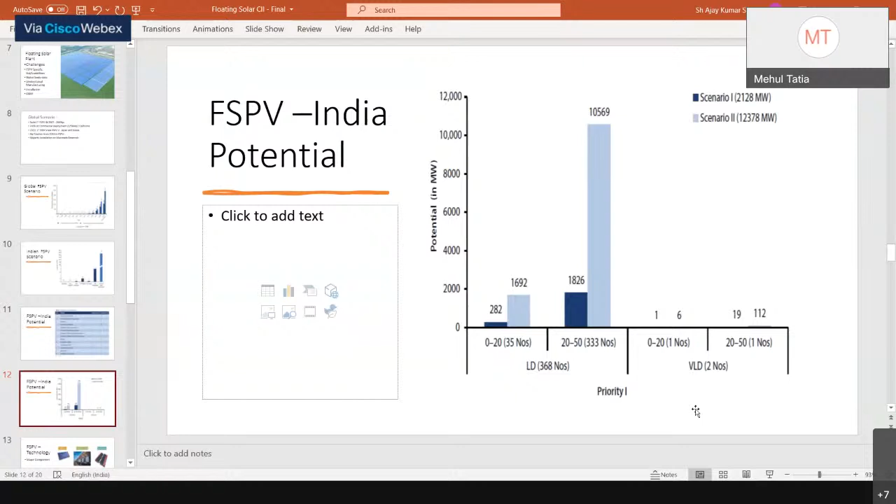Looking at the Indian scenario, in 2019 tendering for around 1800 megawatt is in process. If you see the potential of floating solar, I have taken only certain water bodies, and even a certain percentage of those can be leveraged. Based on a conservative estimate from this report, around 5% would give about 12 gigawatt of potential that can be leveraged.

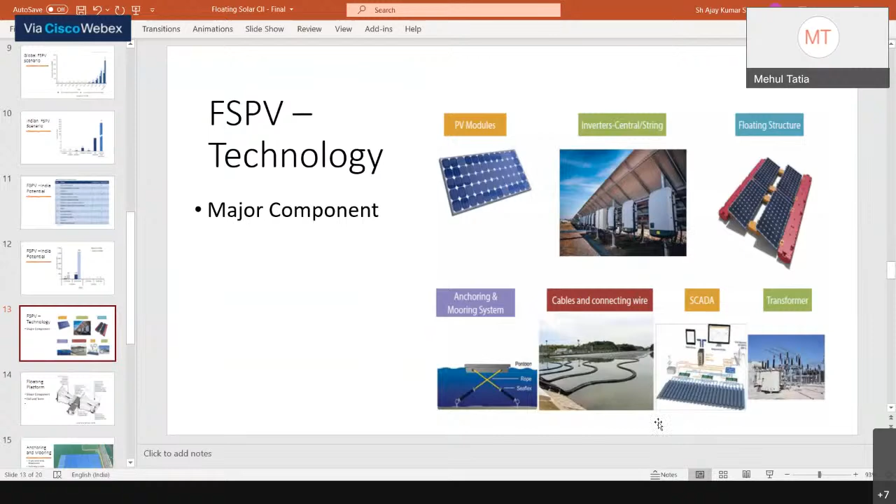If we talk about floating solar technology, some parts are common with land-based systems, like PV modules and inverters, which can be central or string type. What changes here is the floating structure, anchoring and mooring, and since it's in a water body, it requires different kinds of cables and wiring. The transformer is common for both land and floating solar. This floating technology has been developed by Ciel & Terre and other manufacturers, some of whom have patents.

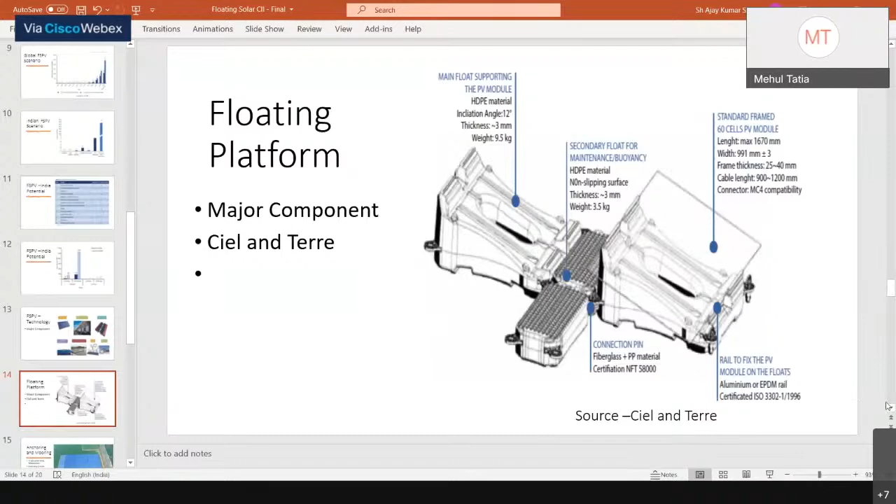The main challenge is anchoring and mooring, because we don't have any piling here since they are in water bodies. So anchoring and mooring is very important, and we have different ways to do it. If the reservoir is man-made, like in a power plant where we use HDPE lining in the reservoir, we do the anchoring outside the reservoir. There are different ways to do anchoring and mooring so the structure remains safe.

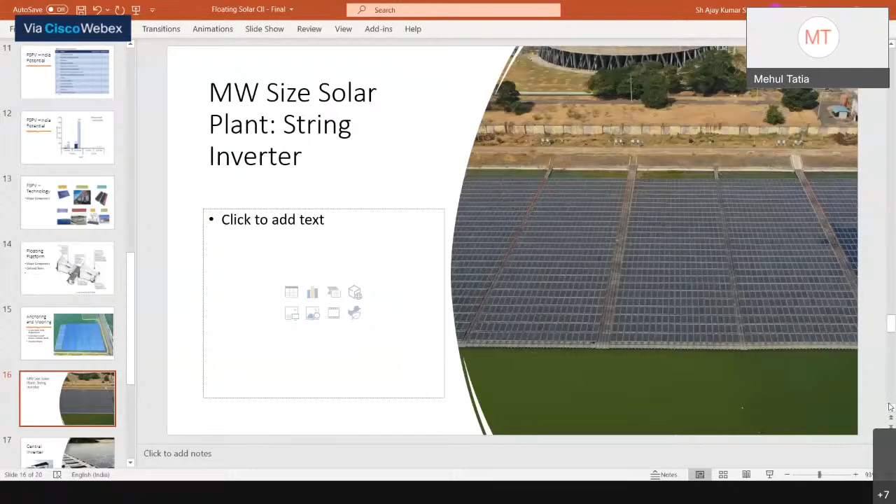This is again a megawatt-size solar example. Here the anchoring was done outside the reservoir, and here it was done through dead blocks within the reservoir. Generally floating solar has been implemented in man-made reservoirs, and the anchoring and mooring design is based on software analysis, with the decision of inside or outside depending on the situation. The type of inverter is similar to land-based systems, either central inverters or string inverters based on requirement.

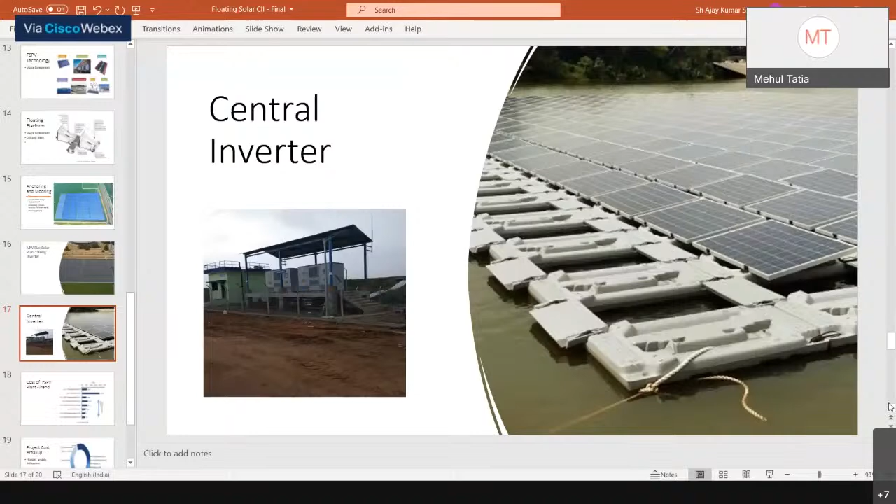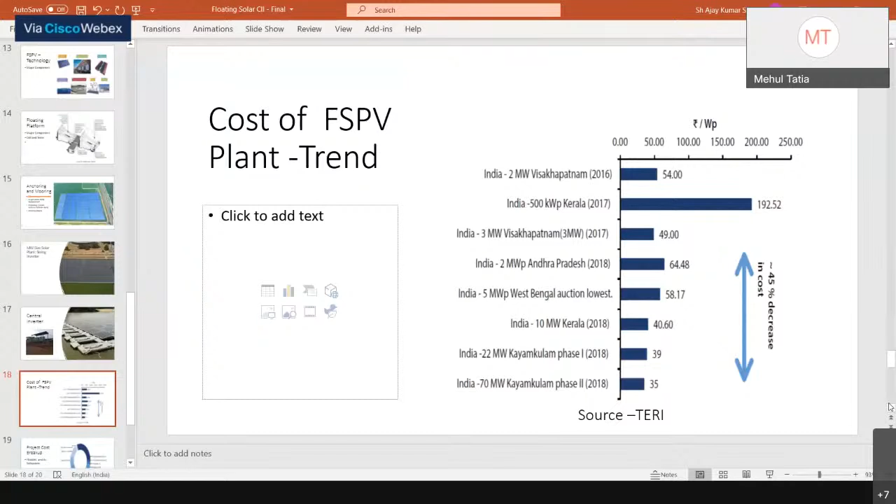As this is an emerging technology, the cost is also coming down as economy of scale picks up. Earlier the cost was quite high, around 50 rupees per watt, now it has come down to around 35. This is coming down due to economy of scale, and we can leverage a lot of water bodies. This is the project cost breakup — mostly the cost is, around 20 to 30%, the water-related cost.

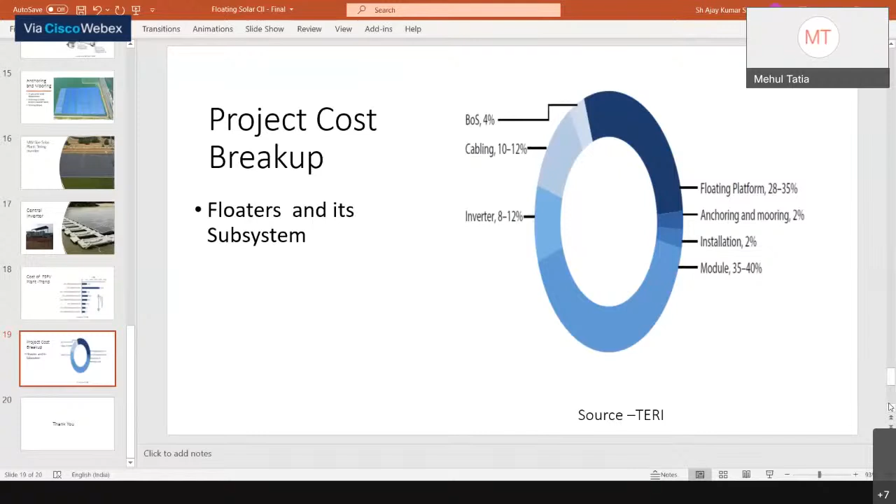So this was a short presentation, and I really apologize for the inconvenience caused due to my voice.

Thank you, madam. Thank you very much. Thank you, sir. Thank you very much. Subhaji, it's a nice presentation.

We have concluded the fourth session. Do we have any questions, Mr. Mehul, from the participants? Yes sir, I have a few questions. Please go ahead. Can you hear me, sir? Yes, please, I have a few questions. I'll just ask — I think the first question is for Mr. Lincoln.

Mr. Lincoln, there is a question from one of the participants. We hear that the iron and steel sector, fertilizer sector, and some chemical sectors would be the first to go for hydrogen-based plants. So what do you think will be the priority? Do you think the power sector would be the immediate priority when it comes to hydrogen-based generation?

That's a great question. My familiarity is really with the power sector, so I can't speak to fertilizer or other uses. But I don't think there's a need, frankly, to prioritize. I think if hydrogen is a good fit, then the project should be pursued, whether it's power generation, fertilizer, or whatever — it really all depends on the local conditions and the local needs.